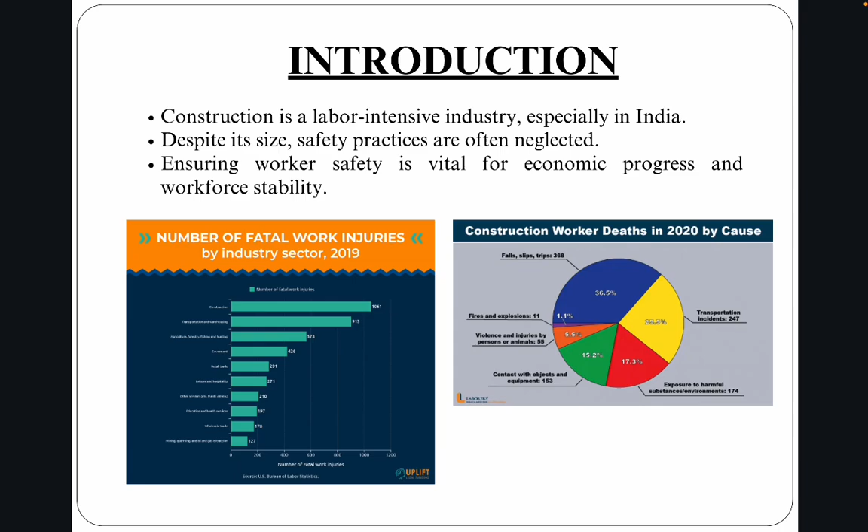Today I'll be talking about safety in construction, one of the most hazardous industries in India. It sees the highest number of fatal injuries, many of which can be avoided through proper safety practices, yet these are often ignored, risking lives and productivity.

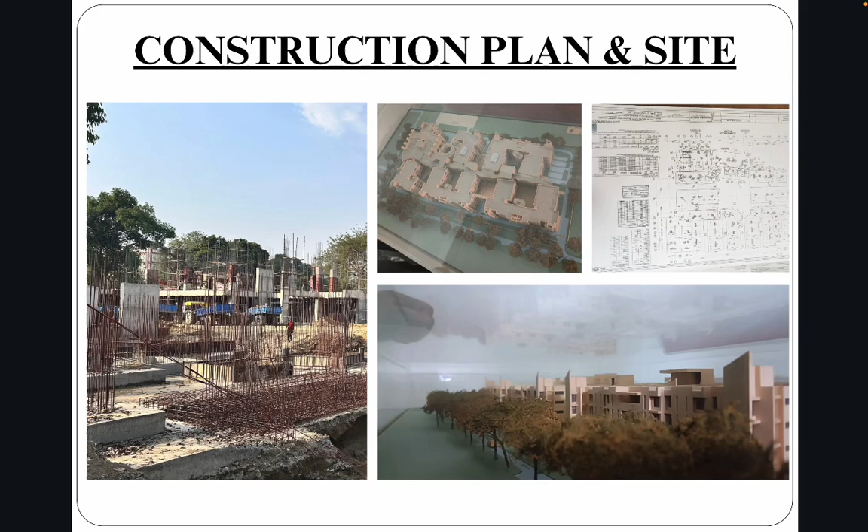Construction plan and site. Site planning is the first step to safety. A well organized layout reduces accidents by ensuring clear movement paths and proper material storage.

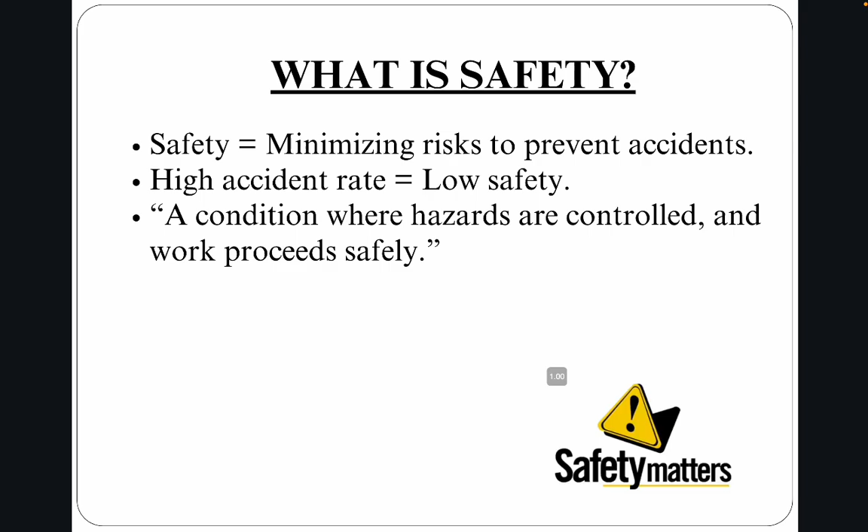What is safety? Safety means minimizing risks so work can continue without danger. A high accident rate shows poor safety practices, something we must improve.

Why does the issue of safety arise? Ignoring safety leads to loss of time, labor, money and reputation. Accidents are costly and usually preventable.

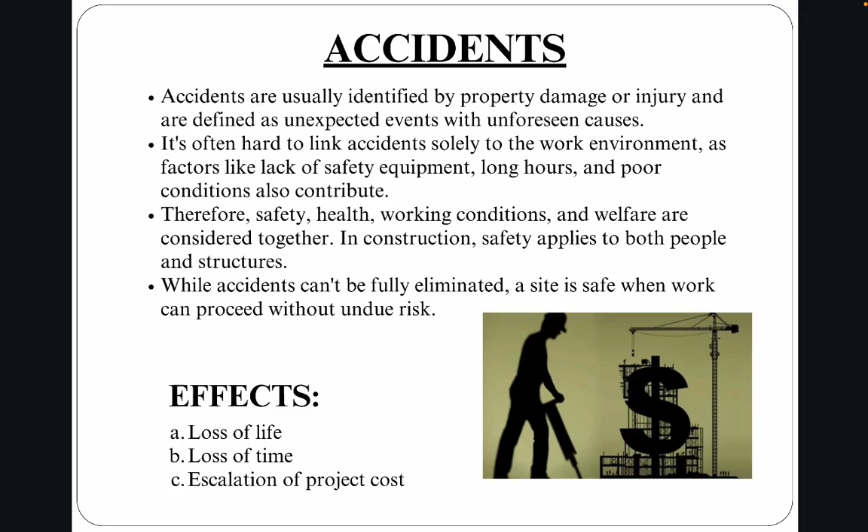Accidents. Accidents happen suddenly due to fatigue, unsafe setups, or long hours. The impact includes injuries, delays, and financial loss.

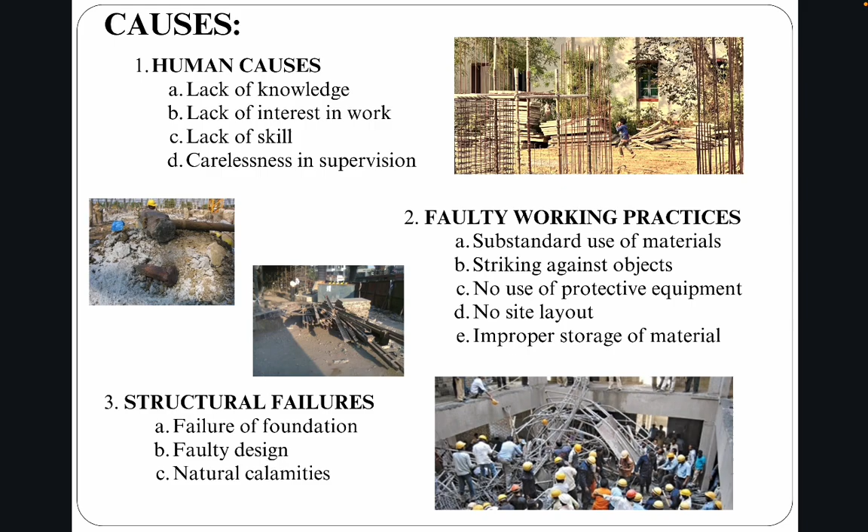Causes of accidents. Common causes include human error, unsafe practices, and structural failures. Even natural disasters can add to the risk. We noticed children of laborers playing at the construction site, which was a clear example of carelessness.

Ways to ensure safety. Role of designers. Designers can reduce risk by planning safer structures, especially in high risk areas like tall buildings or bridges.

Safety program. A proper safety program involves regular training, drills, and accident tracking. Education is key to prevention.

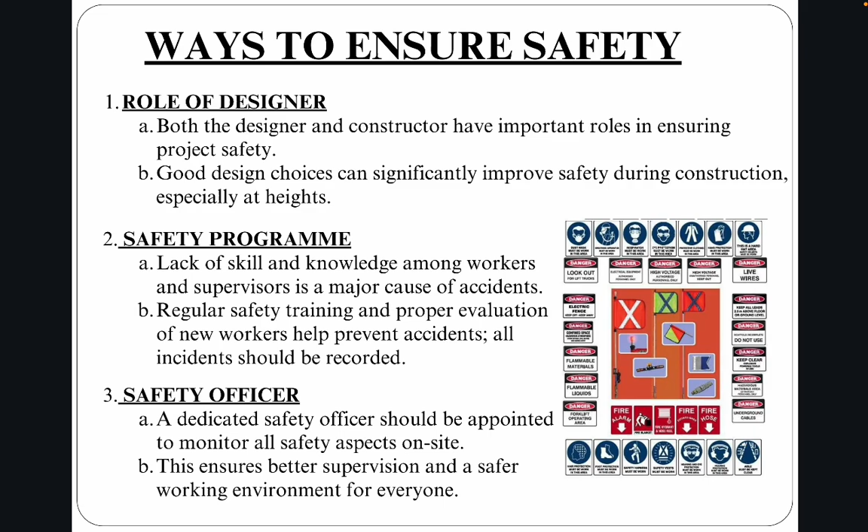Safety officer. A safety officer monitors work on site, enforces rules, and spots risk early. Their presence can save lives.

Equipment. PPE like helmets, gloves, and harness protect workers. It's the basic but most vital defense on site.

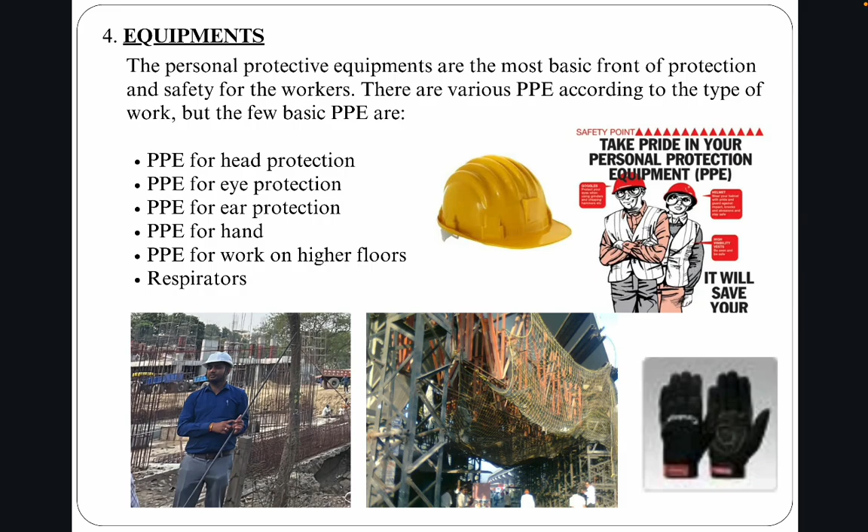Conclusion. Safety in the construction industry remains poor in India, leading to frequent accidents that affect not only workers but the entire project. A safe environment is possible through the collaboration of designers, contractors, laborers, supported by strict government regulations.

While safety gears are crucial for preventing accidents, they sometimes reduce a worker's comfort and efficiency. Additionally, the cost of implementing safety systems and training programs can be high.

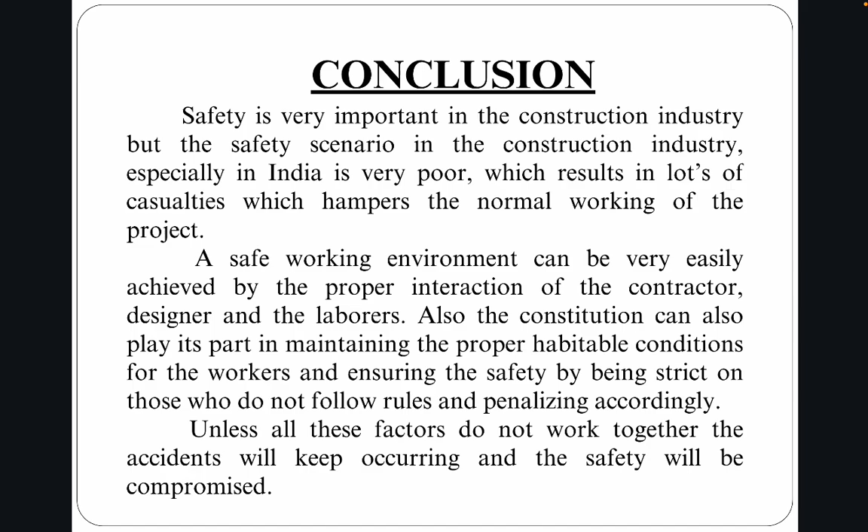However, these investments are minimal compared to the immense cost, both human and financial, of an accident. Safety should not be seen as an expense but as a long term investment in project success and human lives. Until all these elements work in harmony, safety will remain compromised and preventable accidents will continue to occur.